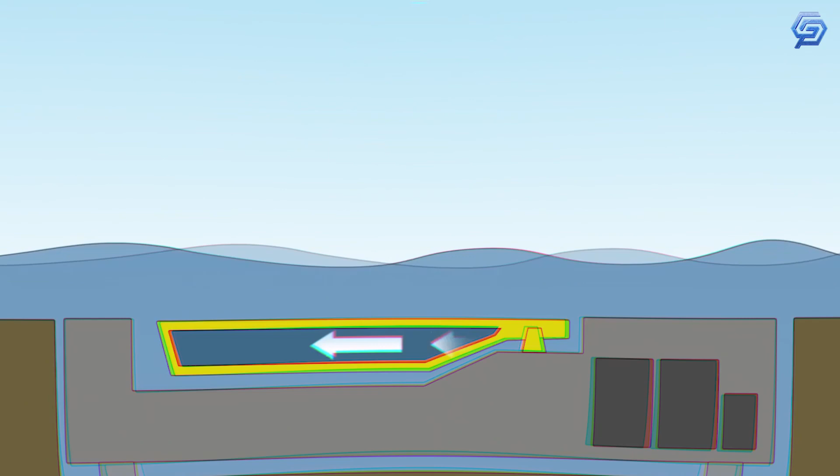To respond to the objective set by the law for Venice 798/84, the complete defense of the entire lagoon from the high tides of any level, an integrated system of works has been developed that foresees the barrier of mobile gates, able to isolate the lagoon from the sea during the events of high tide, complementary works, and the rise of the banks and pavements, at least up to positive 110 centimeters in the lowest lagoon dwellings.

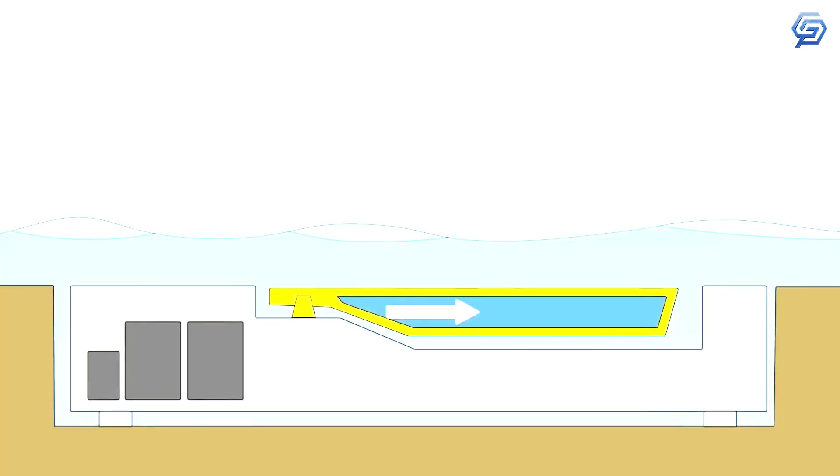The integration of these interventions defines an extremely functional defense system that guarantees the quality of the water, the protection of the morphology and the landscape, and the maintenance of the port activity. So what are the operating principles of this $7 billion project? Let's take a look. It consists of rows of mobile gates at the 3 inlets, which temporarily separate the lagoon from the sea in the event of a high tide.

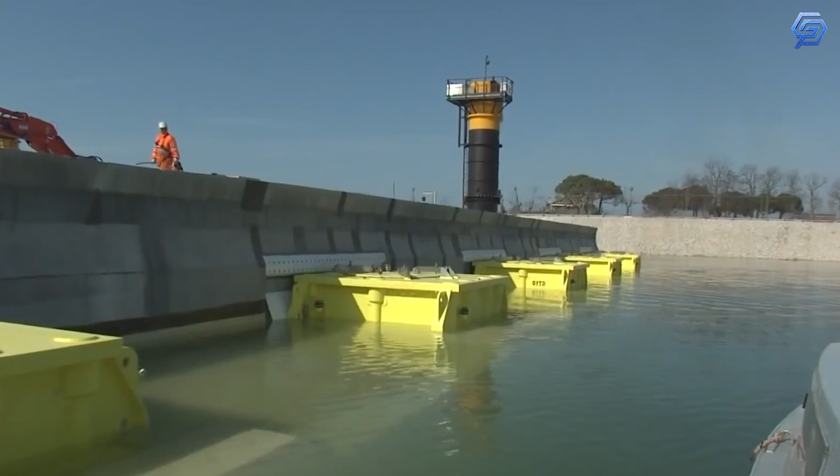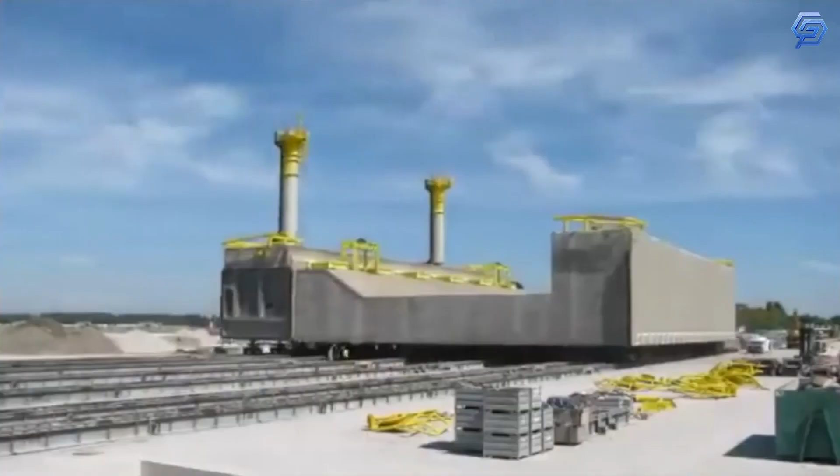There will be 78 gates divided into 4 barriers. At the Lido Inlet, the widest, there will be 2 rows of gates of 21 and 20 elements respectively, linked by an artificial island, 1 row of 19 gates at the Malamocco Inlet, and 1 row of 18 gates at the Chioggia Inlet. The gates consist of metal box-type structures, 20 meters wide for all rows, with a length varying between 18.5 and 29 meters, and from 3.6 to 5 meters thick, connected to the concrete housing structures with hinges, the technological heart of the system, which constrains the gates to the housing structures and allows them to move.

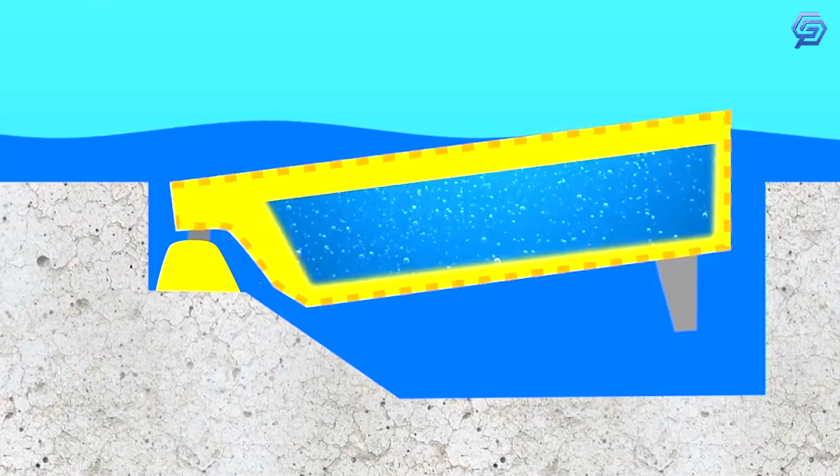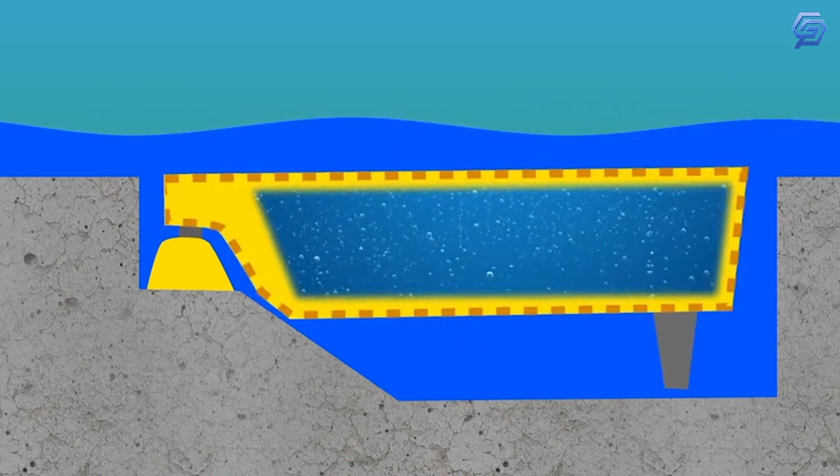Under normal tidal conditions, the gates are full of water and rest in their housing structures. When a high tide is forecast, compressed air is introduced into the gates to empty them of water, causing them to rotate around the axes of the hinges and rise until they emerge above the water to stop the tide from entering the lagoon. When the tide drops, the gates are filled with water again and return to their housing. The inlets are closed for an average of between 4 and 5 hours, including the time taken for the gates to be raised and lowered.

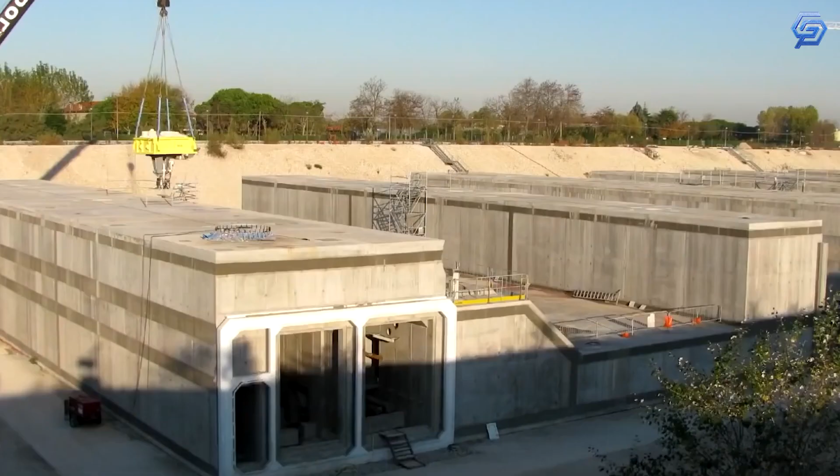Construction of MOSE was authorized by the Comitatone on April 3, 2003, and the associated construction sites opened the same year. Work began simultaneously and continues in parallel at the 3 inlets of Lido, Malamocco, and Chioggia. Currently, about 4,000 people are employed in the construction of MOSE. On July 10, 2020, the first full test of the system was successfully conducted. Amid fanfare, the Italian Prime Minister Giuseppe Conte activated the 78 mobile barriers. MOSE is expected to be fully functional by the end of 2025. It was used actively to combat threatened flooding on October 3, 2020.

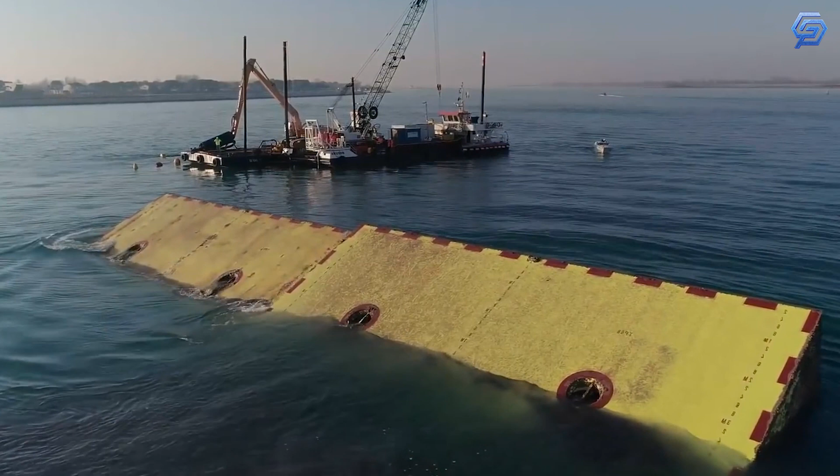Of course, projects of this size are rarely without their detractors. One of the main criticisms leveled at MOSE is that the barriers interfere with the lagoon ecosystem, turning it into a pond rather than a living lagoon. But when the barriers were up for 48 hours last year, that was as a trial to test their resistance. In the future, even in periods when the barriers are up daily, it will only be for a few hours at a time. They have also installed locks at Chioggia and Malamocco to enable some fishing vessels and industrial ships to pass while the barriers are up.

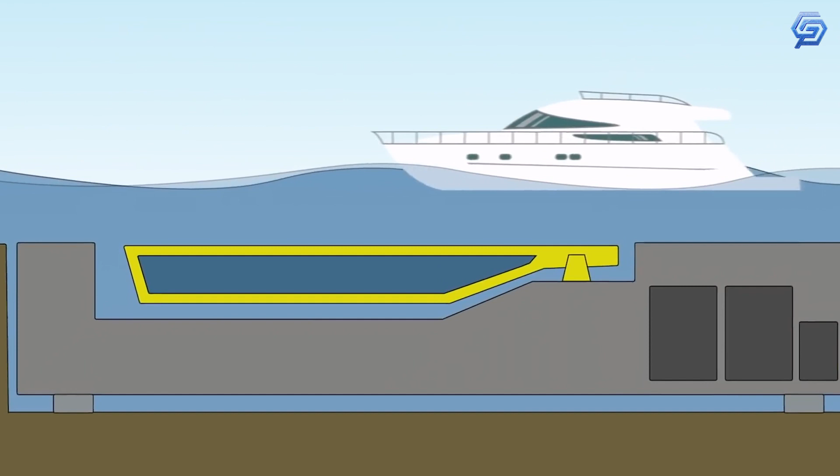We hope that this is the final solution and that the problem will be solved by 2025. What do you say? Do you believe that the MOSE system will save Venice in the future?